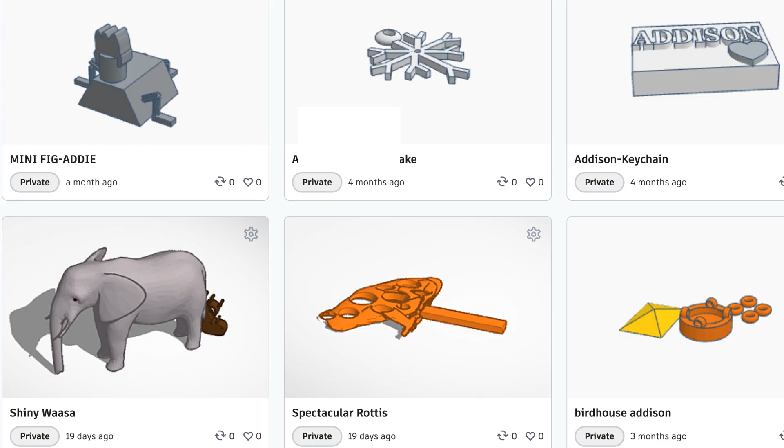I'm going to go and grab one of my students' projects. I need to print it, and I can see everything this student has ever created for our projects. We are creating bubble wands, and I think it's funny that they wrote 'bubbles' for the bubble wand - pretty cute. I always check out the design and make sure everything is flat on the work plane. If I need to squish anything together, I usually try to do this with my student.

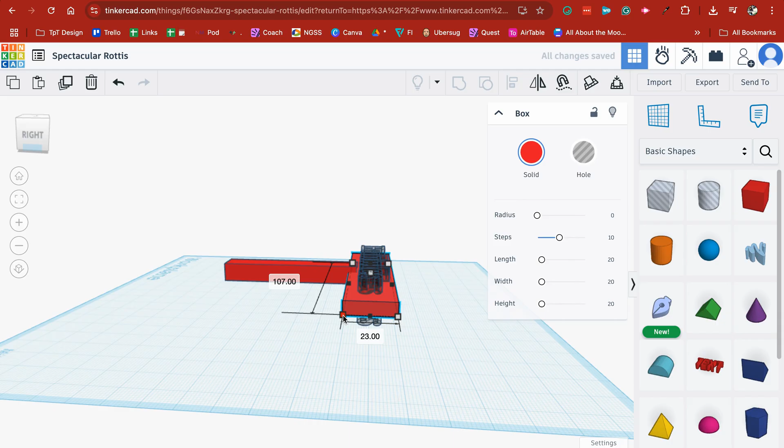But there are times where I might need to make a little bit of adjustments, and the kids know that. I try not to change their entire design. I like to group the project together so it's all squished up, but you don't have to do that - it does make it nice and looking very nice.

What I like to do is take a screenshot of their project, and then add in Seesaw a screenshot of their actual project so they can see what it looked like, their parents can see what it looks like. This is something students can do, and it's just a nice little touch that I like to add while I'm already in their account - just a little bonus. You can see I have their projects after they're finished and in the process.

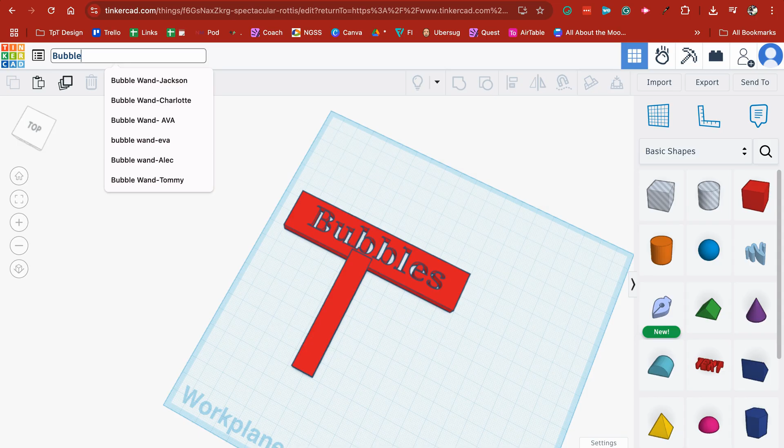With their files, I like students to name what type of project they created and then add their name afterwards. If there's a lot of different classes, I'll also have them add their teacher's name. Then I click export, and most people will be clicking STL - that most likely will be the kind.

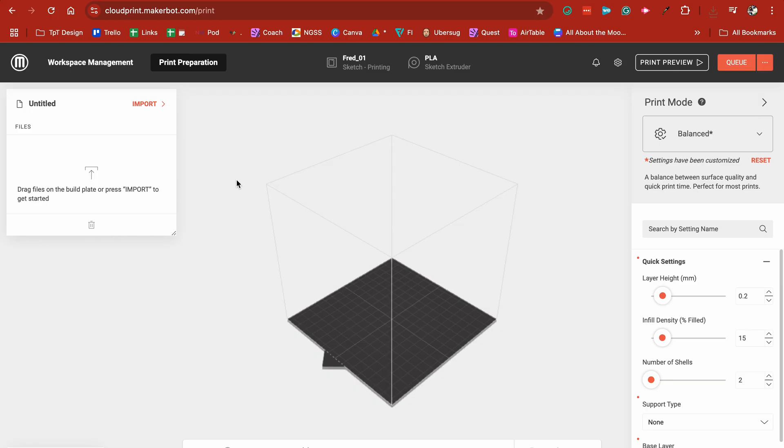I create a folder on my desktop of the project, so whether it's that class, each class will have their own folder so I can easily get through a class, or for this instance, I have a 3D printing club and their projects are all in the same folder. I save their file in that folder, and this will look a little different depending on what your slicing software looks like. This is the slicing software for MakerBot, but I just wanted to show you a couple things, like when you're looking in your settings, what that means.

So I'm going to import my file, and it's really nice - it's in that folder, it's all organized. I can even upload these to my Google Drive later, so I have that option.

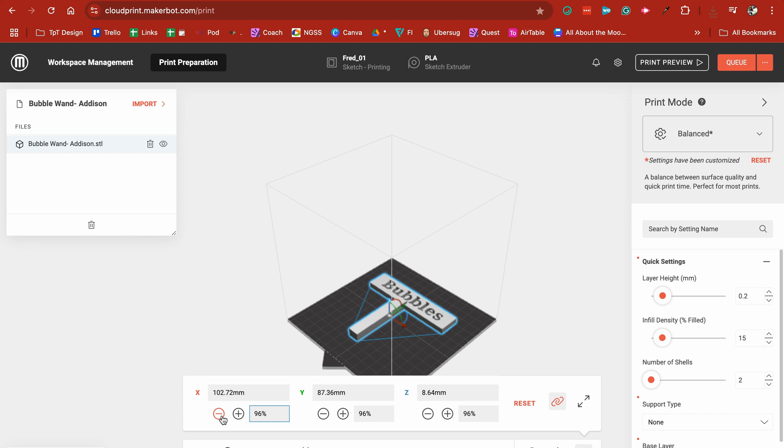Most slicing softwares, I've used quite a few, give you the option where you can resize and scale. Depending on your project, maybe you want it to be a little smaller. I actually do want her bubble wand to be a little bit smaller, and sometimes with their projects I make my students scale it - sometimes I don't.

Another thing to note in your slicing software is if you want your design printed with some support. It might be named differently, but this is saying, do I need extra support to hold it up while it's printing? A breakaway means those supports will be printed along with your design, and they will actually break off afterwards - it's pretty crazy. Some prints have to be printed standing up, and they do need that support. They can't always lay down, so that's when those breakaway models are really helpful.

Some of my students' bubble wands were round all the way around, so I had to print their bubble wand standing up.

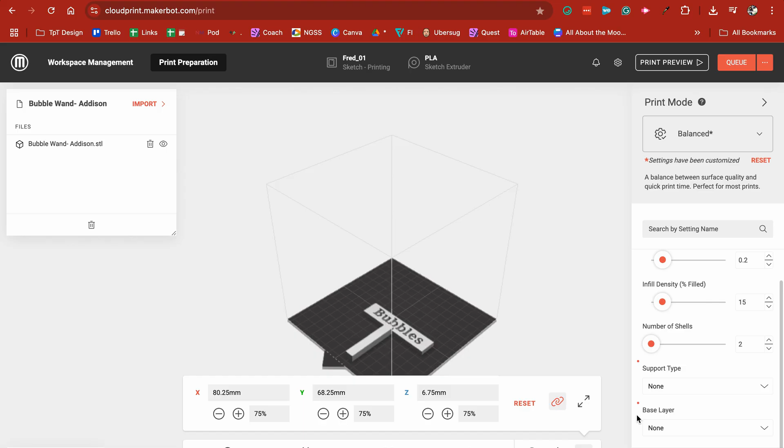This is another option of support - do you need to print it with a raft? So does it need a little base on the bottom of the print bed just to stick better and to be a little bit more supported? For this instance, I am not adding that.

And for my 3D print software, I click it and add it to the queue. So I can actually choose the order when I want things printed, which is really great because I have things that are going to be in different colors.

So I hope that's helpful - nothing too complicated. Keep it simple, especially when you're printing a lot, but good luck in your printing journey.